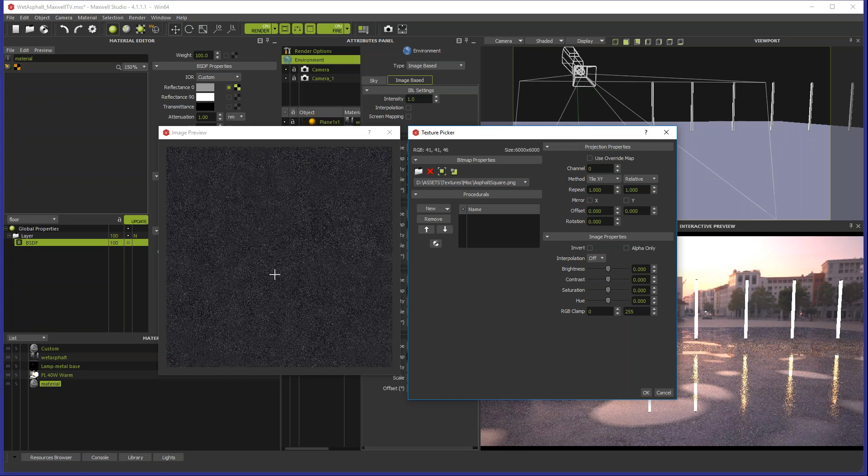So, new material, and the first thing, of course, I'm going to just add the base texture, the base asphalt texture. Let's see here, since it's already loaded. Should be here. So it's not a very good texture, actually, I just did this very quickly for an image I had to do. And so it's just a diffuse base, first of all, and maybe it's too dark now, just brighten up a little bit.

Now, since I'm going to apply this to this 10-meter plane, I'm going to switch on the use override map for the tiling, so I don't have to change the tiling in all of these layers. So I'm going to use the tiling from the override map here, maybe start with setting it to 3 or something. I'm just going to apply it to the plane. Okay, so that's what it looks like so far.

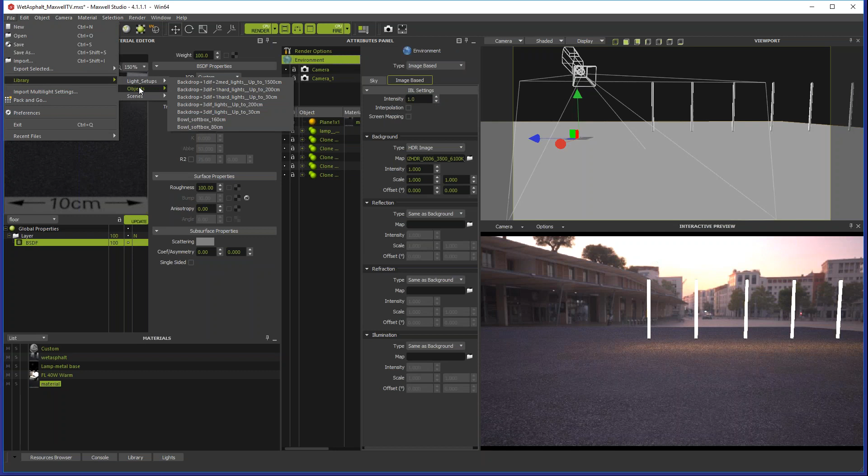And it's lit by an HDR, by the way, the scene, and these lamps are from the library, file, library, bulbs here, object bulbs, I just imported these ones.

Okay, so first I'm just going to make like an overall wet looking asphalt everywhere. So I'm going to add an additive layer, and I'm just going to set this to 0 for now. I might as well set the ND to something like water. And I'm going to use, first of all, a global bump map.

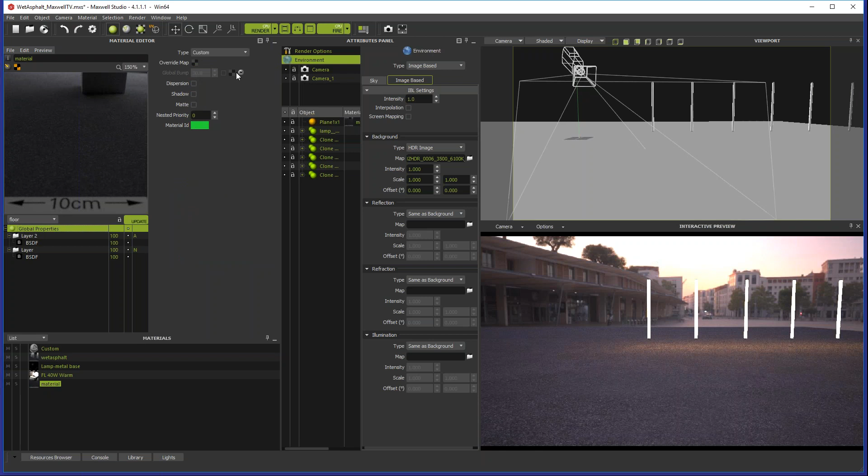But you'll see why I can't do that later on, I have to change it. So I'm just going to load this normal map that I created from the asphalt in Photoshop, and turn it on as a normal map.

So already there's a sort of a wet looking asphalt thing there. First of all, I can lower the bump. So even with the normal map, you can lower it a little bit and it's going to have less of an effect.

So now I have an overall wet looking asphalt. You can see how it looks really wet everywhere. So to make it a little bit more interesting, I'm going to load... not this one, this one, a sort of mask created also from the texture to make it not so evenly wet everywhere.

And also, by the way, sorry, things just really freeze up a little bit when I hit the render button. Yeah, especially with the material editor, I think it's very aggressive. Let me see if I can hit stop. Hopefully it still records when this happens.

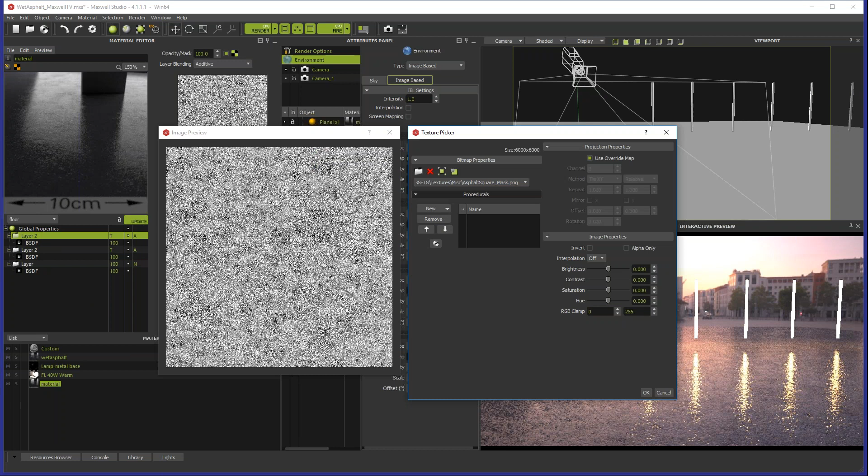And for the mask, I'm going to show you quickly also how to create this mask. So these are going to be my puddles here.

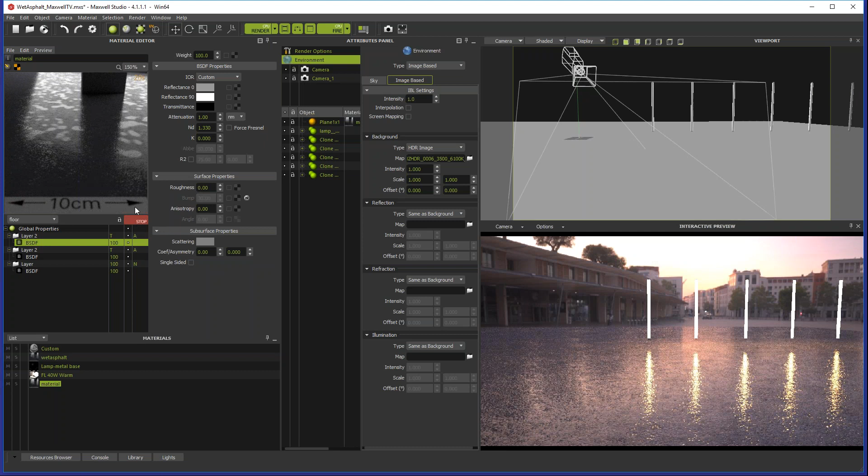And I'm still in additive mode for the puddles, which is going to be a little bit of a problem. It's just that it becomes too bright when it's not supposed to, because of the water. It's supposed to be water on top, but it still becomes too bright. You can see here by the horizon.

Let's see if that works. Okay, compared to if I switch it to normal mode, you know, it's supposed to be dark like this because of the water puddles, not bright like this. If you watch here, it turns bright with the additive mode.

But the main problem here now is that I can't use the global normal map anymore, because the puddles are supposed to be just clear water. So I have to remove the normal map from here, and I'm just going to set it to the wet asphalt on the bump here. So, not forgetting to switch it off from global bump and set it also to use the override map.

So now I have the sharp puddles. And set this also to normal mode. So already this could look okay, but the problem is now that since I have to keep the puddles here in normal mode, you can see especially the difference if I switch to additive, it starts to look weird, especially here by the horizon. So I have to keep these puddles in normal mode.

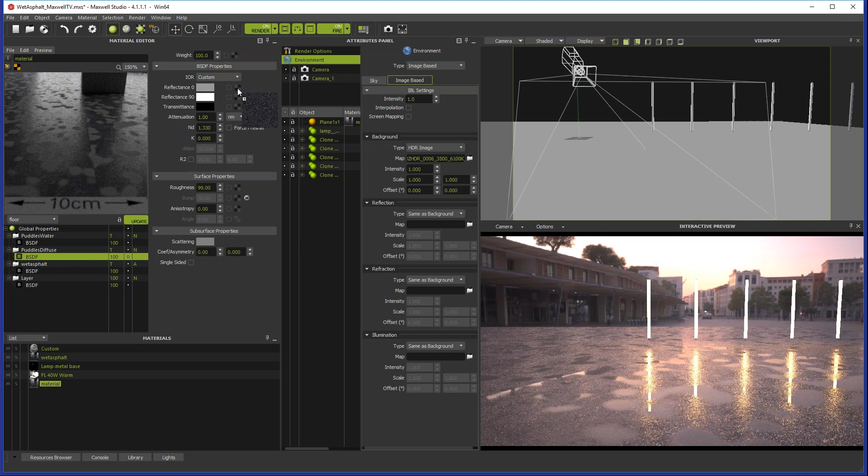And the second advantage is that now I can actually copy this to the diffuse, just making sure it's set to override map. And I'm sure all of you are familiar that when something is wet, it becomes darker. So you can mimic that also by just darkening this diffuse asphalt where the puddles are going to be visible in the water.

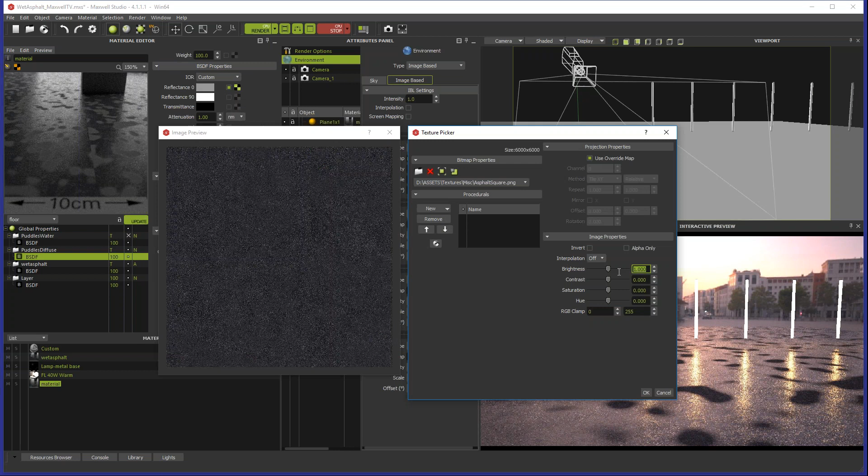So if I hide the puddles water for a bit, I can see what this texture looks like. Okay, so you can see how maybe that's even too dark. Let's try 5. Still too dark. Maybe 15.

Something like that. So now I have my underneath-the-water dark asphalt, and when I turn on the water puddles, everything comes together, and now I don't see any bump or normal map that I'm not supposed to see.

It's only visible in the wet asphalt here, not in the puddles. And because I lowered the opacity of the top puddles water layer, I can still see the asphalt a little bit underneath here. Also, with this mask I created for the puddles underwater, I can play with the contrast a little bit and make these edges smoother or sharper.

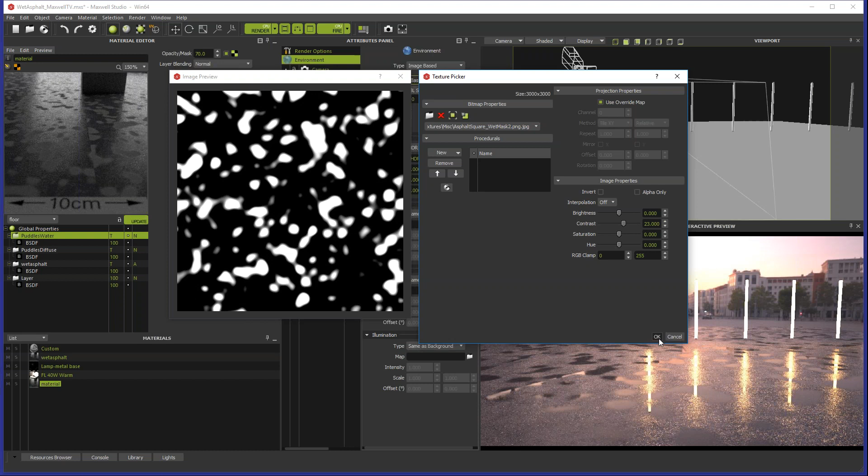So here if I raise the contrast, then suddenly the water begins abruptly. But this isn't so realistic, because if the puddles are thin, you're going to see a small area where the water is mixing with the dry surface. So I still like to keep it not completely sharp edges, but you can play around a little bit like this, so you have separate control with the water puddles compared to the diffuse mask here.

And that looks a little bit like this. Actually, is it this one or this one? This one.

Okay, so you can see now that we don't get that little artifact from the normal map of the wet asphalt. We just see the clear puddle, and we also still see a little bit of the asphalt beneath, and we had this nice transition between the asphalt and the deeper puddle here.

That's pretty neat. Yeah, so that's it really, it's all those layers. And again, you can change the transition here simply by using a sharper or blurrier mask for the wet puddles.

So you can see a dark outline here when the asphalt is still wet. Imagine you could also have completely dry sand, and then a puddle in the sand. In the transition area, it's going to be darker sand before you actually see only the water. Right, that's it. Nice.

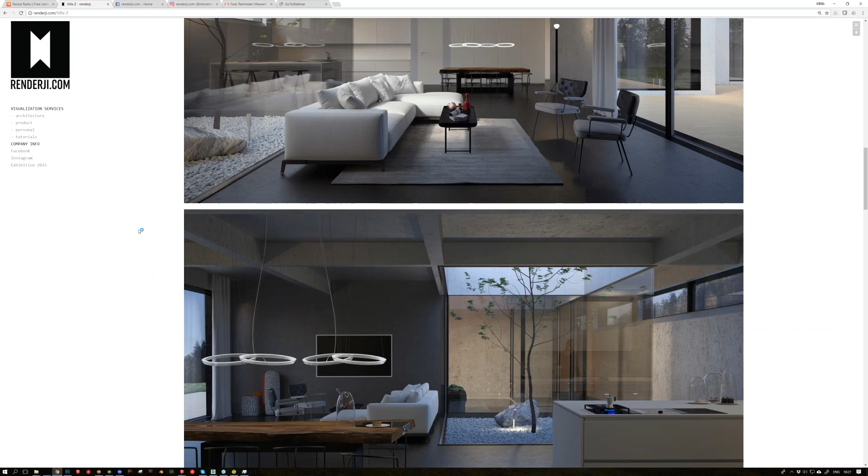When I was thinking about how to do this, I decided to just show the whole process of how we do images. Since we mentioned at the beginning that we want this to be informal, I'd like to emphasize that if you have any questions along the way, please interrupt and ask, and I'll try to answer everything.

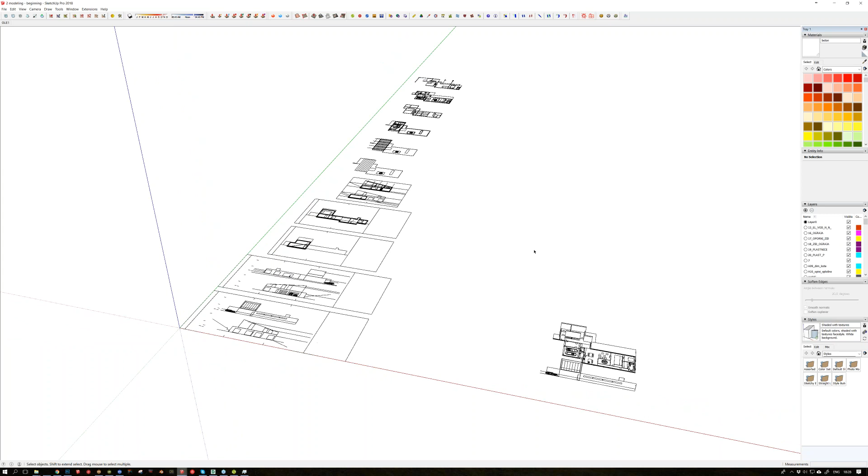I do some stuff in Blender or Cinema if there's something more complex, but then I always import it into SketchUp and use it as a proxy. So this is how importing a plan looks like in SketchUp, and this is how the beginning phase of the modeling looks like.

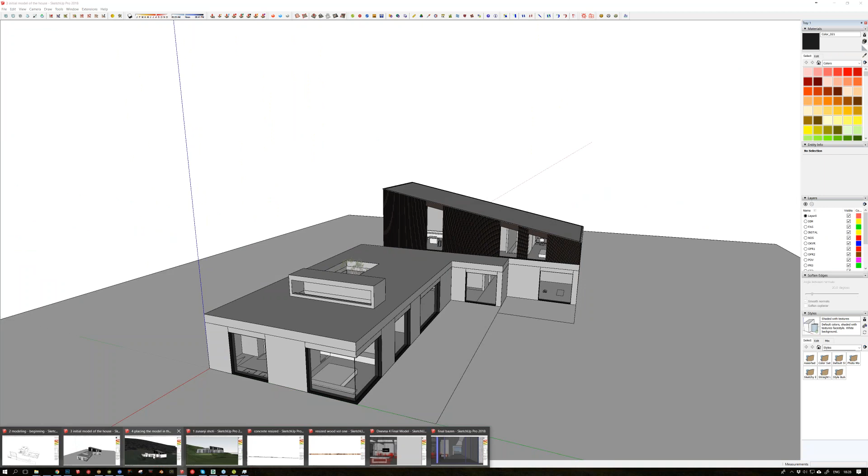Then we had the whole model of the house, which is like this. And then, the workflow is basically split into four sections.

The first phase we call the draft phase, where we propose scenes of the architecture to the client, depending on what they want to emphasize or show. In order to do these test scenes, we just place this super beginner level model into the context.

SketchUp has this neat feature where you can add terrain and geolocate stuff, so that's very useful when you want to do sun studies. For example, there's this really cool atrium in the house, and this helped us a lot to figure out how the sun is supposed to affect the building and interiors and so on.

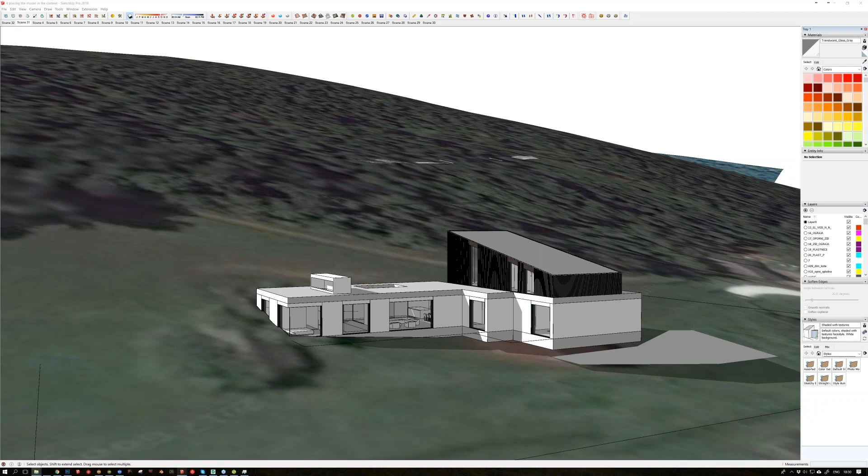For this first draft phase, we would see the client and say - they wanted to have 3 drone shots, because the emphasis of this whole set of images was to try and portray the vast plot of land around the house and this big hill up here. So we said, okay, we're going to do 3 drone shots, and this was used to decide for the scenes, and also to have some data later on when we would actually go on site with the drone and do the photography.

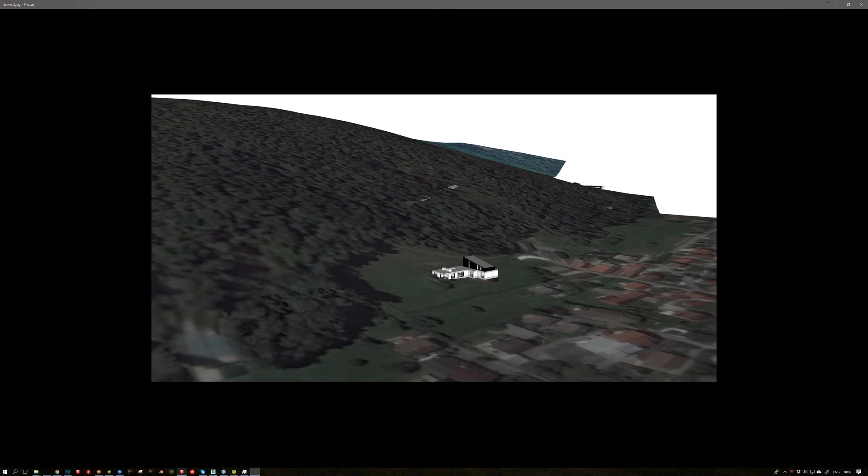Then they wanted 3 classical exterior shots - this is one of them, and the second and the third. And these were some super quick scene proposals for the interiors. So they gave us their blessing and liked the scenes, which was a green light to go and start doing a bit more complex stuff.

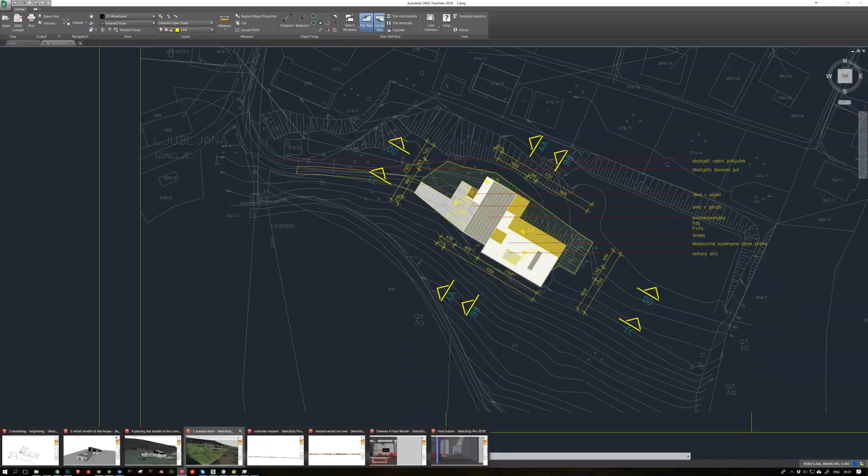So then in the next phase, we generated this 3D terrain based on the elevation lines, or something like that. We generated this in order to be able to place the model a bit more accurately than in the first shot. And then we started applying the materials.

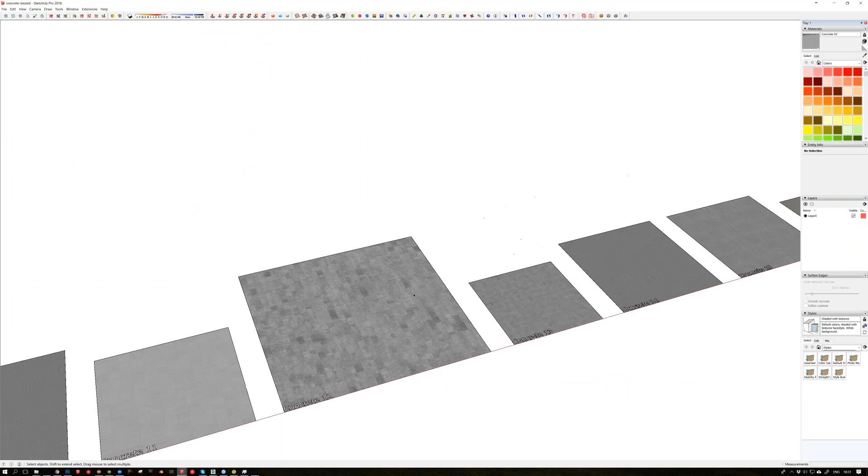As far as workflow goes in this project, we used the Arroway textures a lot, and this is a SketchUp file I made where I have the whole collection done with really small res textures, so it doesn't choke up the viewport and you're super fast to manipulate it. Let me pop up the scene manager here. Basically it's like MXM referenced materials, so in the SketchUp viewport you see low res stuff, and when it renders, it's going to be the high res textures and materials associated with it.

Could I just ask something here? So you did this to have a sample of the textures, which is better than just seeing them in the material editor, or?

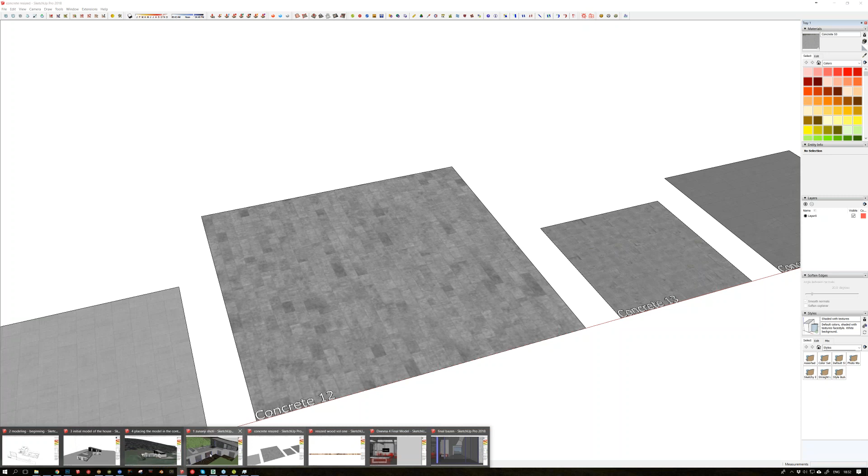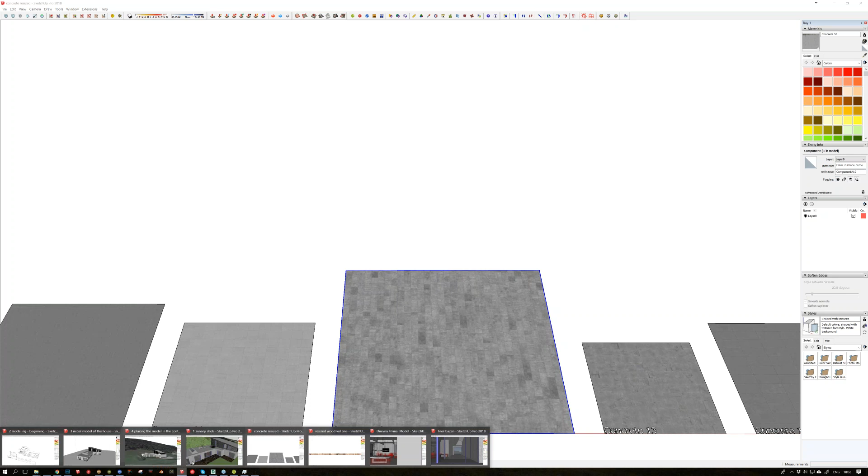Sorry, I don't think I understood the question. So what is the purpose of this scene, to have all the samples laid out? It's equivalent to having a few of these files open in Windows Explorer. The thing is I already have a SketchUp plane in real size, with the material applied in real size, and then I just copy it and put it into this model, and apply the colors, the materials, from this plane.

I remember this debate also on the forum, I think you had some similar SketchUp questions. The thing is, if I have this in low res, it doesn't choke up everything, and it makes everything much smaller and easier to operate.

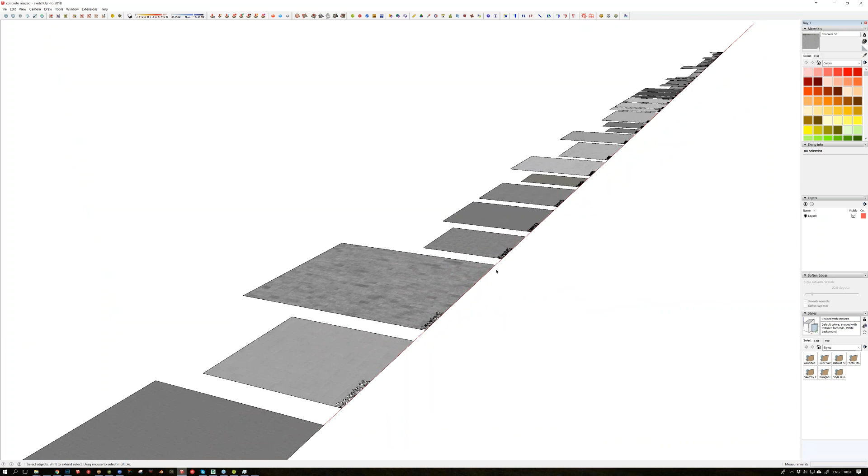Right, because the export tends to take a lot since when you're using big textures, right? Even when you're using Fire for some reason. Yeah, it's huge. This is why I figured this helps a lot. And the reason I have all of the materials in one SketchUp file is because they are already properly scaled here. I don't have to start each project by applying this texture, scaling it properly, and so on. It's just a time saver.

So I just wanted to show that, in this project, which was based a lot on concrete and wood, these were the beginnings of materialization. And then of course you would adjust the materials later on, but for the initial stuff, this was used in this way.

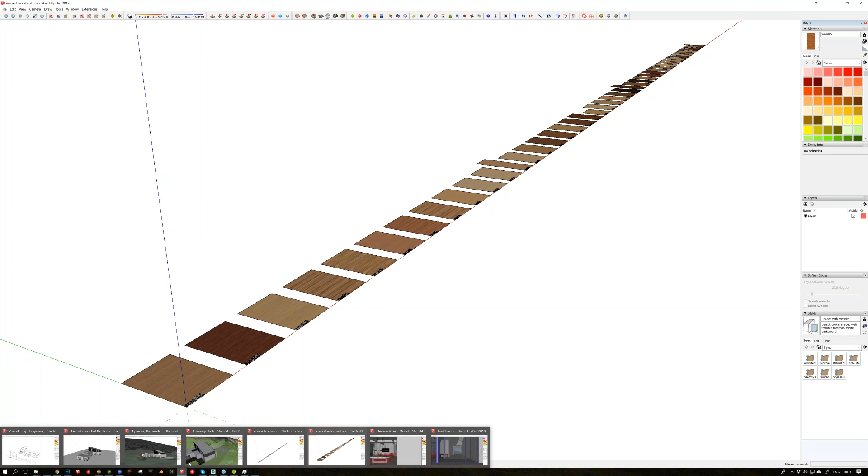Let's see what's next. In the previous step, oh my God, I forgot to mention the photo-taken aspect. So when we had all of this set up, we went on location and took a bunch of photos, and this was our post-production base for later compositing the renders into these images.

Did you take any special steps to line up the model with the photos, or was it more by eye? By feeling, totally by eye.

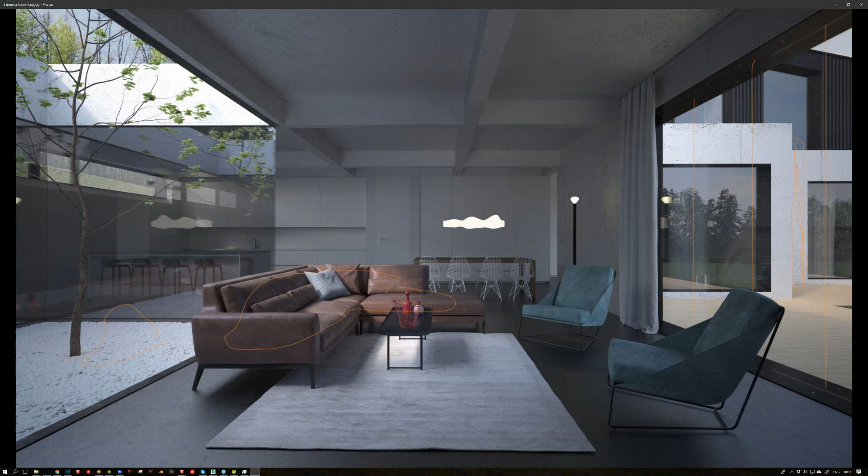So what you're showing here is one of the test images you're showing them, right? Yeah, this is basically the first render delivery, a set of images based on which we were able to have a discussion. We show the images and then talk about what things to show or hide. I draw over the renders and make some comments, and we discuss it. It's super rough and not there yet, far from it, but good enough for discussion.

We were very lucky with the drone ones because everything was cool here except the tree was like 3 meters too big, I think, so we just had to skip it. That was cool. And this was pretty much final from the beginning, so that was pretty neat.

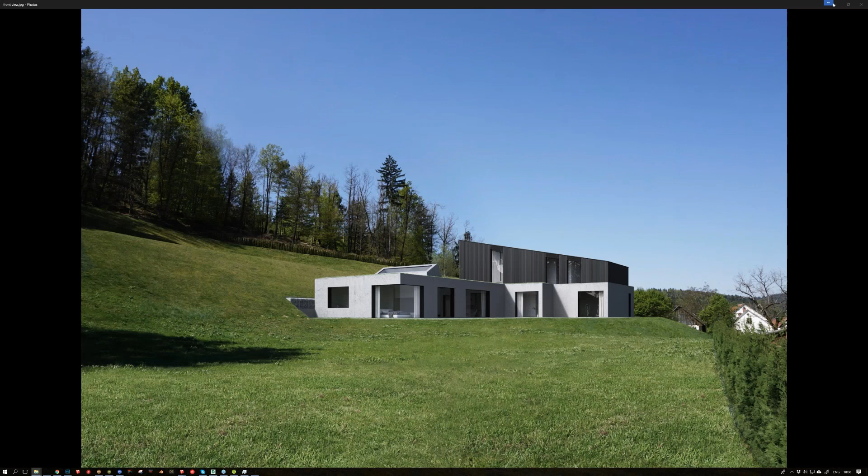Then we have these revisions, and I don't want to bother you through the whole tedious back and forth process, but I prepared 2 final interior scenes in SketchUp just to show you, for example, what the modeling looks like, and this is the MXI output that we get from it.

For example, this plane here is basically the kitchen, and it was made invisible to the camera. I really wanted to have the reflections of the kitchen in this atrium glass plane, but if I didn't have it physically here in the model, it wouldn't show up in the reflections either. So it's kind of weird to navigate, but you just turn it on before you put it to render.

These red boxes are like proxies, so these are all MXS references, right? Of furniture and stuff. Right. Yeah, exactly.

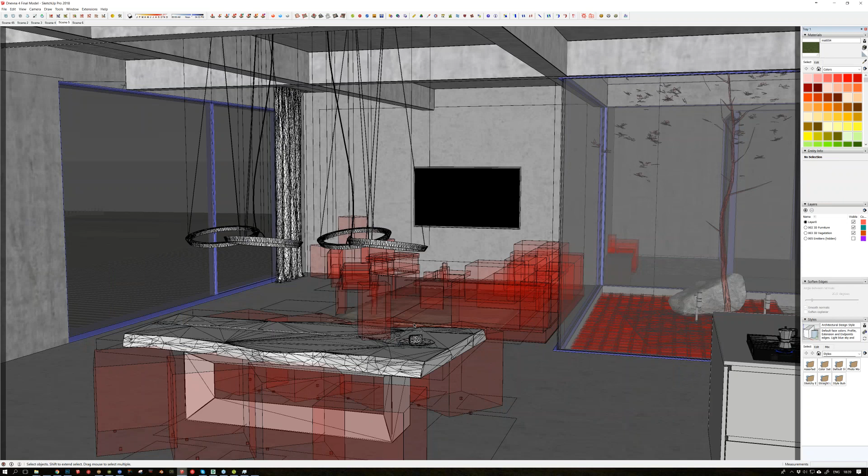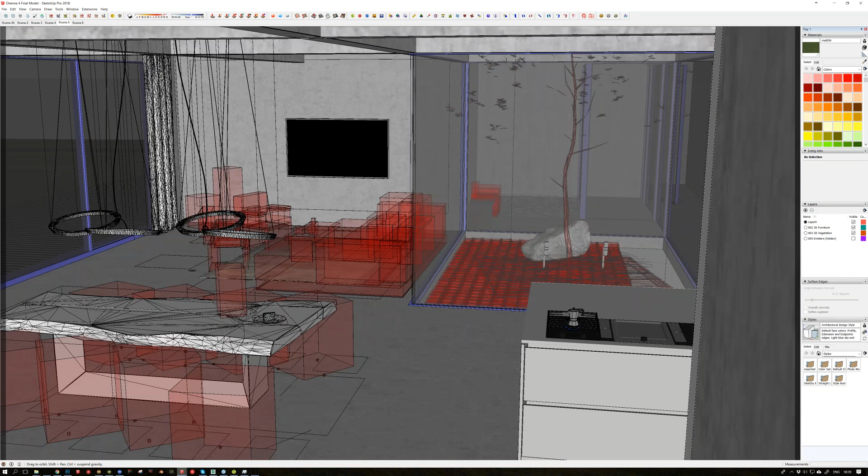I could go a bit more into detail if anybody's interested, but basically these are just reference geometry of highly detailed furniture that SketchUp is not able to handle at all. The unfortunate thing is when you import a proxy into SketchUp, you just get these boxes, and then I figured a workflow, which I'll just mention by words because I don't want to derail too much.

It's this really neat software called 3D Browser, and it has a functionality called Polygon Cruncher. Basically, I would import an OBJ or FBX of that model, put it into Polygon Cruncher, and reduce the poly count. For example, if I isolate this and make a super banal low poly representation of that model, then copy paste this into the MXS reference red box that appears by default, it's way easier to manipulate.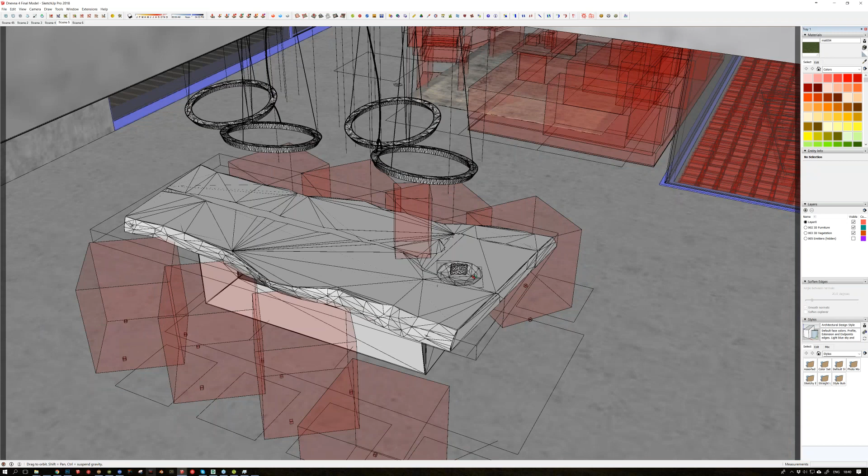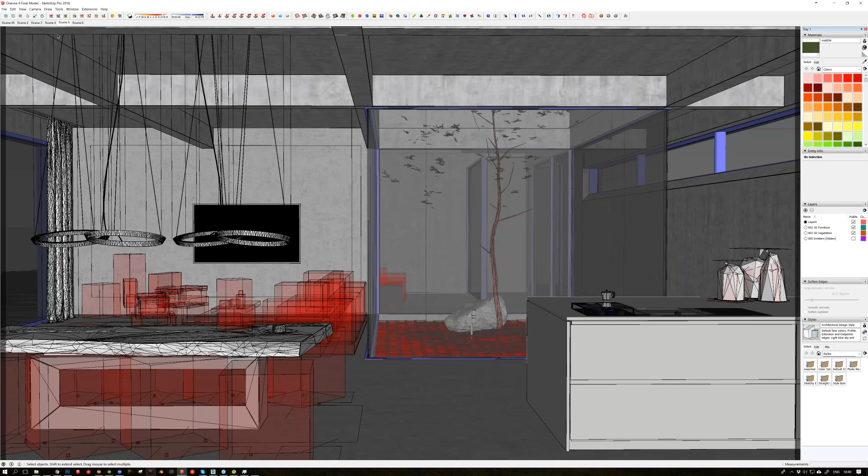It sounds kind of silly, but it's worth it once you do it. For example, this lady here is also super low poly, you can see it by the square, not round nose and stuff. She seems angry, she seems super weird. But it makes SketchUp operate fluidly.

Then this is the output that comes out of it, and of course multi-light is one of the key features, one of my favorite features of Maxwell. This is usually where I pop emitters into the scene as I feel like, according to the lighting scenario I'd like to create, and then all the fine tuning is always done in multi-light.

So I was thinking, for example, this is the final image, and I can show you how it looks like in Photoshop. So yeah, this is how a not really nicely organized Photoshop file looks like, but I'm going to show it anyway. Nobody organizes their Photoshop.

I don't know, one of my New Year's resolutions this year was to make a system for this, but it's still coming along. So basically these are the original files, and I put a picture background here.

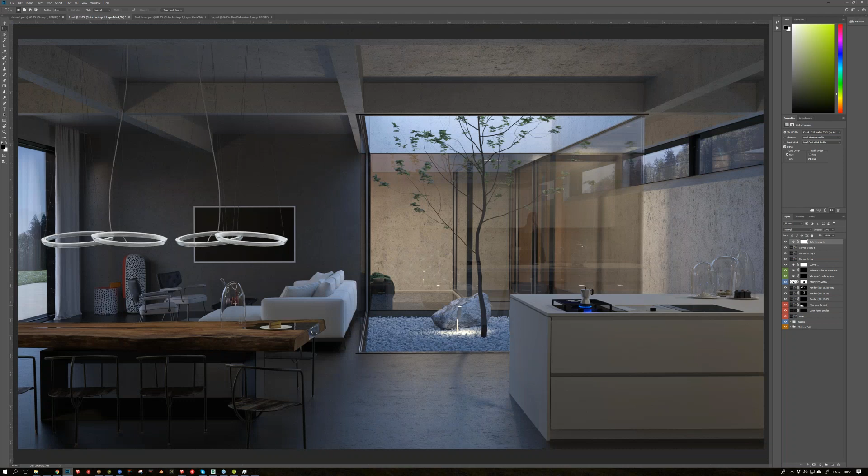I did this, you're gonna like this - these are the Vizpark tree proxies, sorry, grass models, great, scattered with scatter. For these, sorry, it's just a couple of pixels there on the left, like a super little amount. But still it's there. So as far as vegetation goes, if it's really in the first plane, or really close, then I would use 3D, but I would usually overlay it with a picture of grass just to give it that extra spice.

And these back here are a picture from the location, because I also had versions where I would generate the whole forest through Vizpark, and from some other retailers and so on. But it just never gets that whole juicy, real life look.

So that's why the photos are here. As far as the post goes here, there's really nothing special. I did a super dumb representation of the caustics here, which is just an overlaid picture of a pool in this area, I don't even know if you can see it. A little bit. I don't even know if it's accurate, but it was a bit better.

And I just slapped a LUT on it, which felt good. So that was about the post production of this guy.

For those listening that don't know what a LUT is, it's like a color lookup table - a color profile, or maybe a bit more sophisticated way to quickly make a nice mood, like a filmic mood or something. Photoshop ships with a few of them, which are actually decent, and I like the Kodak ones especially - they seem to work well on Maxwell renders.

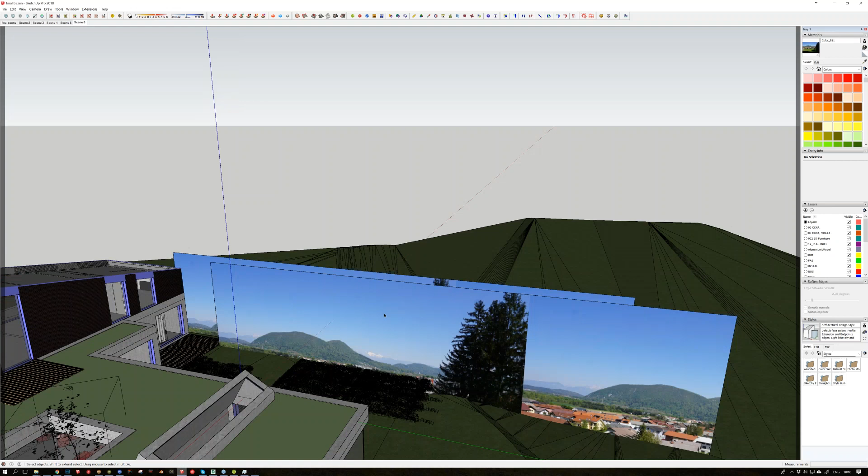It's just floating somewhere, hidden from camera but not from reflections, so I can see it in the pool. I see it in the pool sphere. It's super banal, but it works.

And the pool is just a flat plane, or does it have depth? It's super basic material. Let me show you... oh, it's not here. So it's a flat plane, not even any fancy displacement or whatever. It's just a super simple material.

Okay, so yeah, and we already went through the post. I think I just started using these LUTs lately, but it's dramatically better, like, effect in this image. So this is without, and this is with it, and it just spices it up a bit.

So I have two questions from people here. Adnan is asking if you could talk a bit more about the lighting setup, how you approach that, how many lights you had in the scene, and if you had any issues or problems to solve there. Then Christoph is asking, for the swimming pool scene, if it's only lit by IBL, or did you also use emitters?

Okay, so I can go through both scenes because they're open in SketchUp here, and I can show you. I'm gonna first show the MXI file to show you the amount of emitters in the scene — maybe this is the first answer to Adnan. So there's like 1, 2, 3, 4, 5, 6, 7, 8, 9, and IBL. Like 10 emitters, and I can just isolate them.

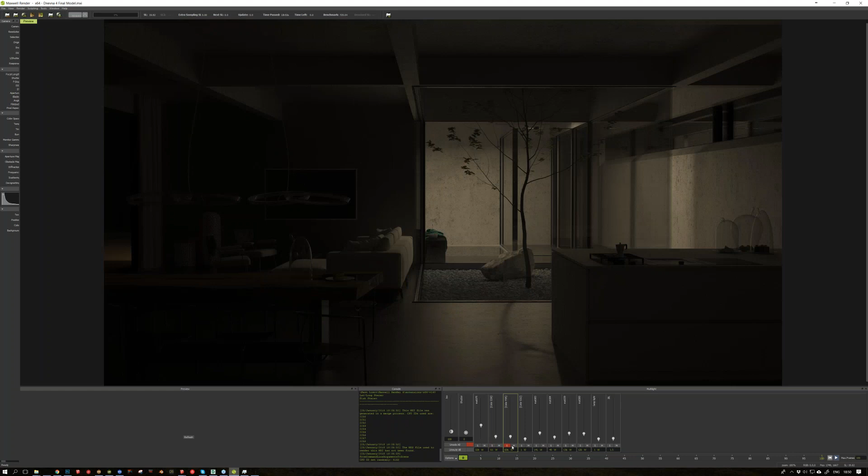And then we have, I don't know, this is something in the pool — I love the way I get this shade from the tree, so that's why it's there. This guy is just the stove with the gas thingy.

One question is from Karsten — I know from the forum he's trying to do an animated gas flame in Rhino, which is a masochistic way to do it, but he's wondering how you did that gas. I think I'm gonna have to disappoint you, Karsten, because this is ultra simple, but it's not animated. It's modeled — so now it doesn't even want to come closer.

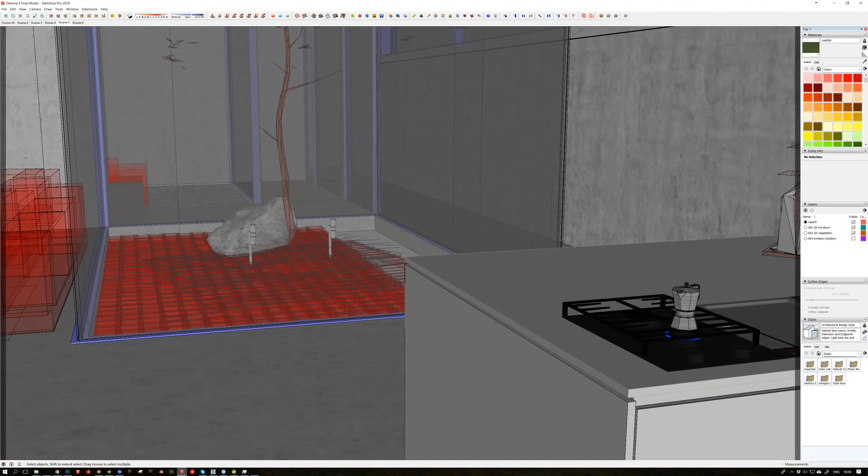It's just like modeled cones with a pointy top, then dispersed around. It's a super low poly body, but it has an emitter applied of this bluish color, and this is the result that comes out of it. But there was no masochism here, unfortunately.

Did you also use a layer mask to make it more transparent, or just lower the opacity, or did it just come out that way? No, I just lowered the intensity to 1, and I think I made 4 different exposures of this interior. For example, I couldn't get this to shine less than it's here, so I made a version of an MXI where I had the ISO a bit lower. Then in Photoshop I would combine all 4 lighting scenarios.

This light was here just like... I hope it's not pretentious. I was thinking, maybe you know you can change the decimals in the multi-light, so if the lowest is 1 watt, you can change that—right click and choose decimal precision. Are you serious? So you don't have to do what you did, it's maybe a little bit faster. So you can do 0.1 watts. Well, thank you for this.

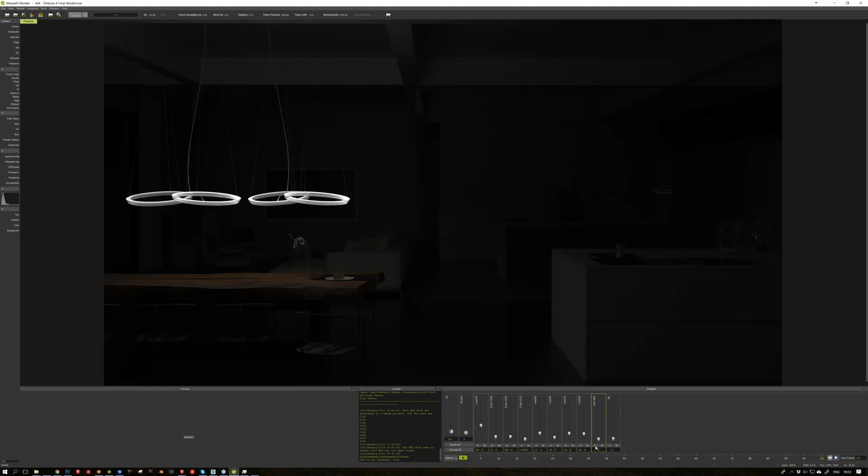I was just trying to emphasize the strong points of stuff that's already done in 3D. I don't know if I'm answering Adnan's question correctly, but basically the lighting setup was—I tried to create this early morning scenario with this girl just waking up and preparing her snacks, and I wanted the lighting scenario to emphasize and portray that. Of course that was manipulated in post a lot, but I hope I achieved the desired effect. This is how it came to be.

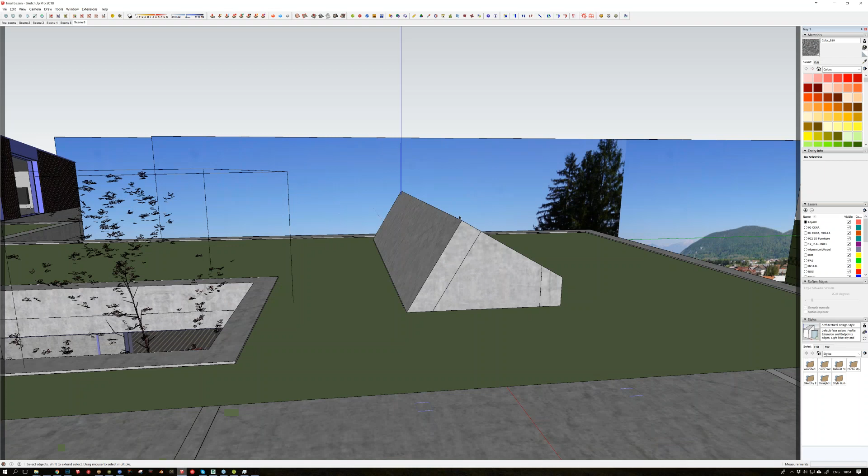And the question from, was it Christoph, about the lights in the pool? He was asking if you're using mostly IBL, especially for the pool scene, or if most of the lighting is made just by the IBL, or did you boost it somehow with emitters or something?

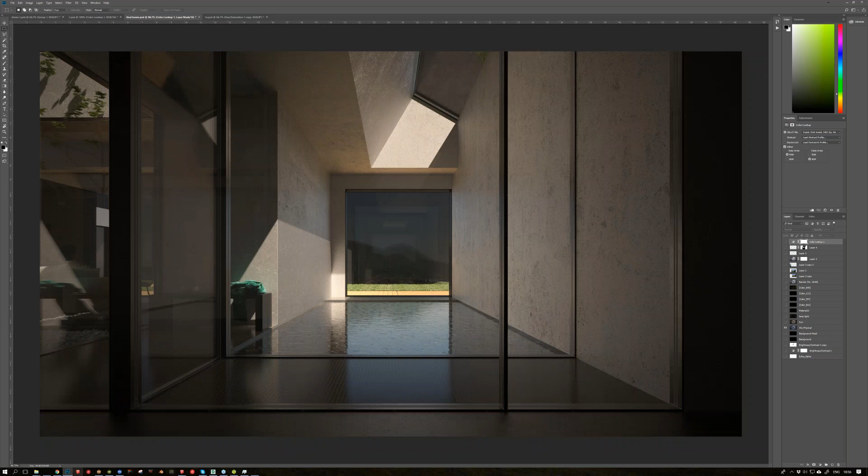I like the fact that I was able to make, for the whole ambient thing, a combination of these two guys in the MXI file with multilight to get the overall feeling, and then I had some emitters here in the scene.

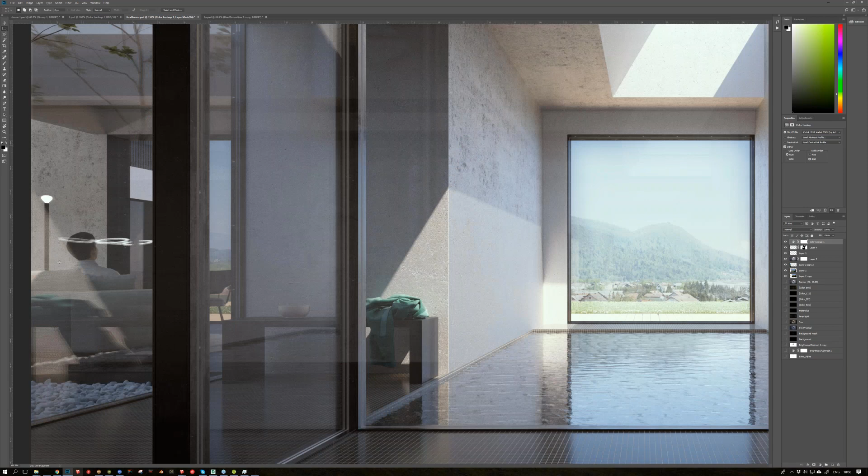There's also a dude here relaxing and looking out the window, and there were some lights on the left side, but not in the pool area itself. We made mock-ups with girls swimming here but it looked super banal, and I really wanted to emphasize just this thing. I didn't want to make it too cheesy, so this is how it ended up.

Yeah, and I don't know. So one question: are you using regular glass for every glass material, or how are you making the glass?

I can show you, I made this when I started doing this in an organized way. This was the first thing I did, create a few MXMs with AGS materials, the architectural glass solution Maxwell materials. So this is like, I always start doing windows like this, with AGS at 1% reflectivity all the way to 100.

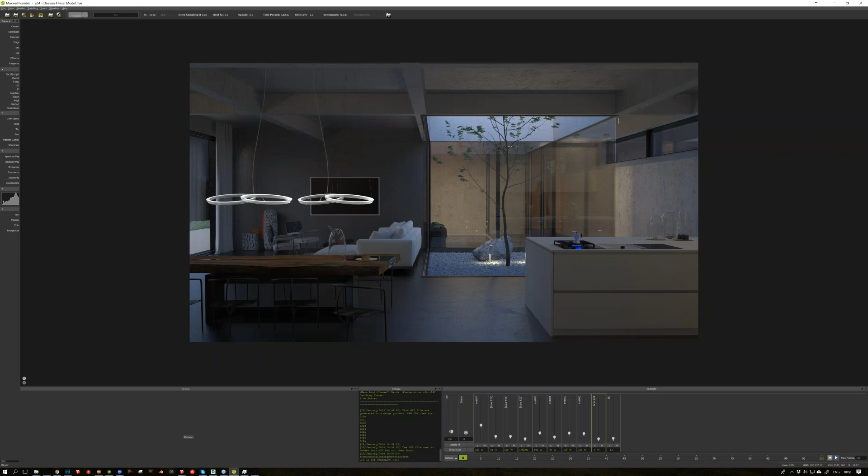I just start, I don't know, with 20, and then see if I like the reflections coming out. It's fine, if they're too strong I'd just use a lower value MXM. But the thing I don't like about these AGS materials is that it's really hard to achieve these effects, like with a regular glass material where the edges... how to articulate this.

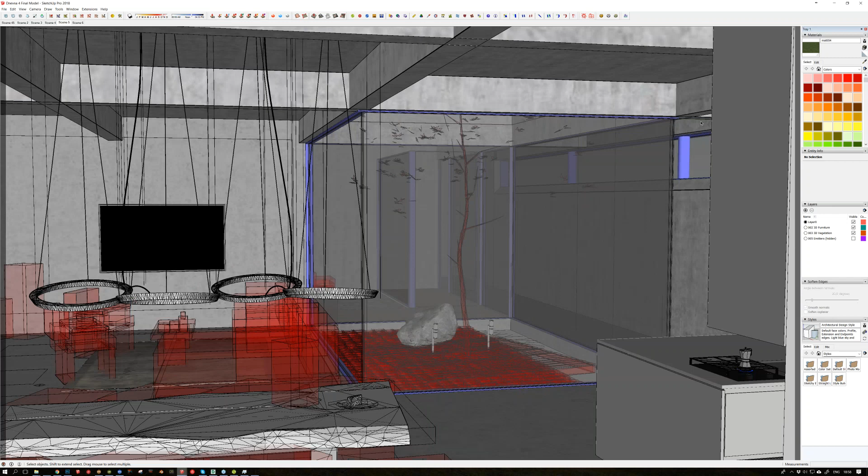Yeah, the edges of the glass. If you do it with an AGS glass material, it's really hard, you can't get these edge details. So here I did a dumb solution: for example, this plane is AGS glass, and here, where we have the joints between glass, it's like I don't even know if I can point it out, it's a millimeter thick. So this is the fugue between, or this layer, the glue or whatever between the glass.

It's a super thin, rectangular extruded plane. It's not a box, just a plane, extruded, super thin, and this one has the glass material applied there, and this way I can use AGS to fine tune the reflection, and also have this small detail here with the glass material.

Can I ask you something? Did you also try doing it with glass first, to see what it looks like? I always had this prejudice of extending the rendering times if I use glass, because of caustics. I know you can switch it off also, but this is just something from when I started out and AGS became default for glass planes, so that's that.

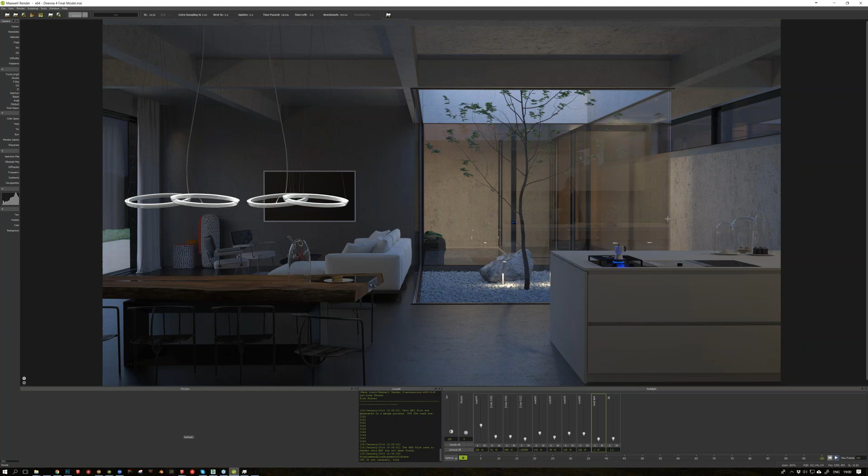I didn't even reconsider that, but of course glass is used here in these domes, because with AGS it looked kind of wonky. It depends, if it's a smaller scale thing, like a product, if I have to make a bottle or anything, of course it's glass.

For windows and stuff, you prefer still AGS. Yeah, this is something interesting.

I need to do some interior tests to see if there are any serious problems with glass. Actually, I have my own render farm with 200 threads, so these speed issues aren't as big a problem as they were when I was starting out with a laptop. But still, this is just a habit, something I've been doing since the beginning, AGS planes and that's it.

Do you usually render other render channels too, or just alpha? Sure, I mean for this one I didn't. It depends on the project. If it's a product, I would always have the material ID channel or stuff like that. But here, totally depends on the project. I knew I was just going to remove the stuff in the windows and replace it with a photo, so for that I only needed the alpha.

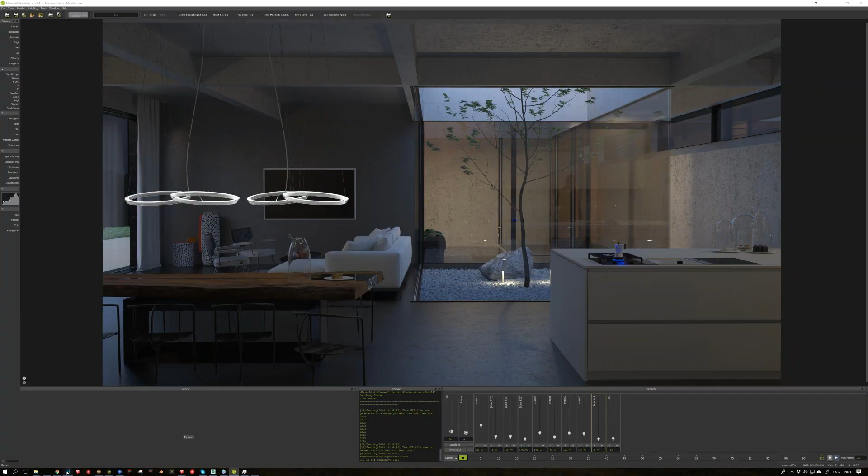So, two questions really. Do you work a lot with... now that you've done so many ArchViz renders, I guess you have a material library which you reuse all the time, right? Sure, yeah, of course. Could you talk a little bit about how you organize it, and what the categories of materials you use are?

And then the second question, from Adnan again: how do you usually calculate the time for a client? How do you tell them it's going to take 3 days, or 1 week, or two weeks? Legitimate question - how much time did you actually have for this project?

Well, this was a super relaxed timeline for a project - basically it was like 2 months. But we also did an animation for it and a VR thing, which was done in Twinmotion, a game-based engine where you can import SketchUp models fairly easily and render them in a very reasonable amount of time. They look like video games, but for the purposes of this project it was enough. So all in all we had 2 months, and the production of the animation was included here. We were pretty fast with the animation because the rendering times were not that high, so we were able to focus more on the architecture.

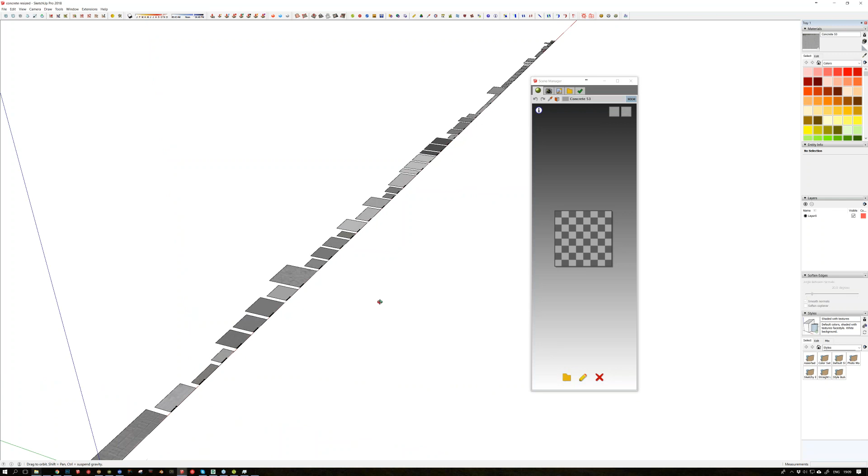So, sorry, there's also not an exact answer - so you don't use very much the built-in sort of material creation in the SketchUp plugin in Maxwell, or do you just go via MXED usually?

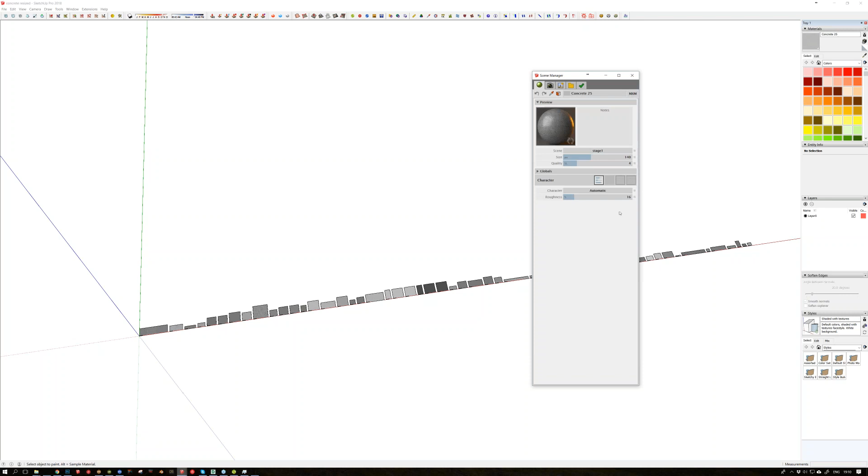The thing is, in the draft scene I would always use that because I don't want big textures in the preview models for the preview renders, because if I slap 6K textures in there, it's going to take longer to export. So I would just do it with the built-in thing and adjust it, like it's either diffuse or shiny, and this is good enough for the draft. Then I would usually do the MXM stuff, because I remember from these tutorials I mentioned before that you can get much nicer results than the built-in thing, and I kind of do the MXMs when it's ready to go into more high def.

Right, because then you can also create the library and stuff, right? Exactly, this is what I like about Maxwell a lot - this thing is external, so it's not SketchUp related.

I can use it also in Cinema or in Blender. Sometimes when I'm preparing the proxies, I would use Studio, and then I would just drag and drop the MXM material presets into Studio. This is super useful, and that's pretty cool.

Karsten was wondering how you go about with the texture scaling, but I guess in your scene here, you're just using the scaling directly from SketchUp, right? You're setting the texture width.

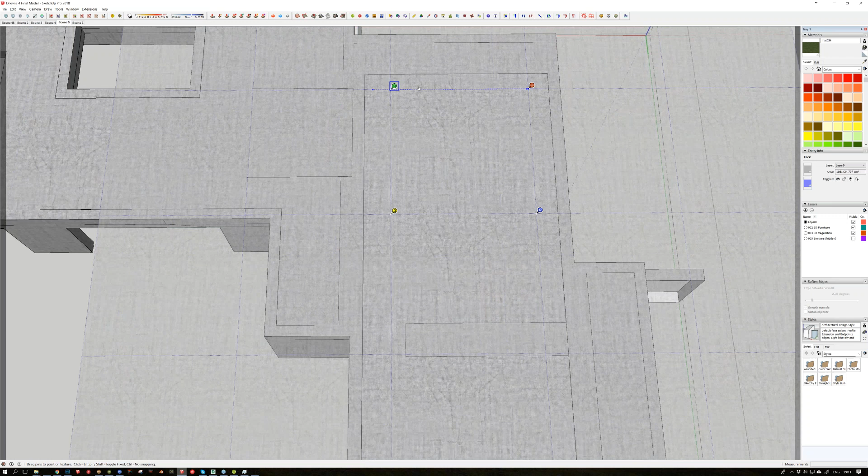If we want to see how this concrete texture is scaled, I'm just gonna use the built-in SketchUp thingy. So this is moving the texture, and this is making it smaller, and that's basically it as far as the scaling goes. Or you can do it here via the gizmo, whatever you call it.

So you don't use the texture thing via the material? It has a scaling, you mean in the MXM? Yeah, or both in SketchUp and the MXM. How do you determine the correct scale for a certain texture?

Here we don't have some raster. Where we have concrete, I would just do it as the default textures come in. I think it's like a plane of 4 times 4 meters, and it's already done like that, as it's supposed to be in nature.

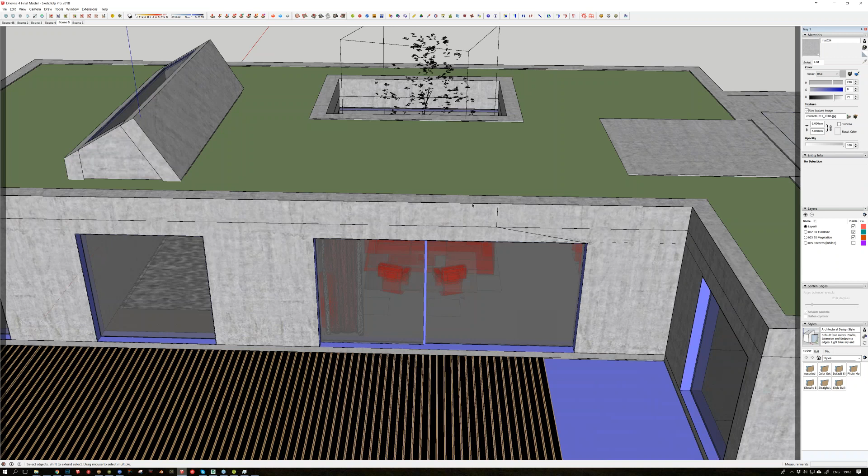For example, I was working on a project before where we had to do tiles on a wall, and each was like 15 times 15 centimeters. I just adjusted it — it's super stupid, but I just did the SketchUp resize tool, made it small, and then measured it with the line tool, 15 centimeters.

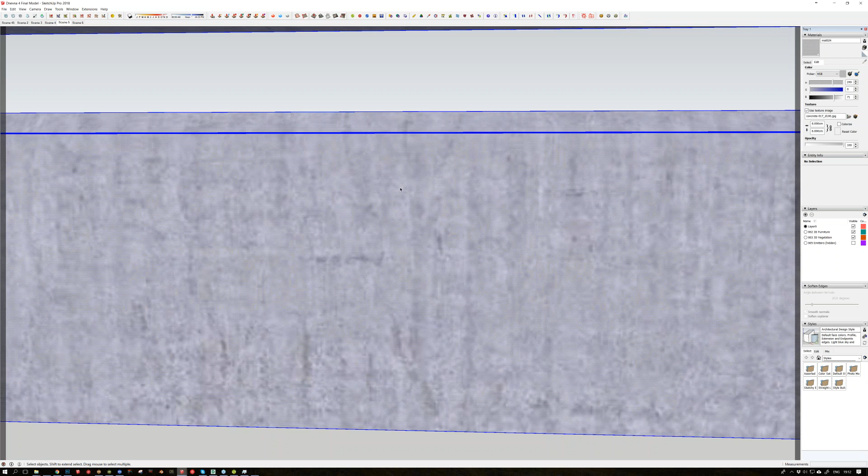Okay, now it's the correct scale. So that was it. I don't use anything else.

I like the way that this SketchUp viewport representation of the texture scale is then maintained when you put it to render. So in your Maxwell materials, I guess the tiling is always set to 1, right?

Yeah, exactly. So when the tiling is 1, whatever you see in the SketchUp viewport in terms of scale, that's what it's going to be in the render, that's right. I think for the way I work, that's the best option. In some cases I had to change that tiling within the MXM material, but I usually don't, because I want the thing to come out rendered as I see it in the viewport, basically.

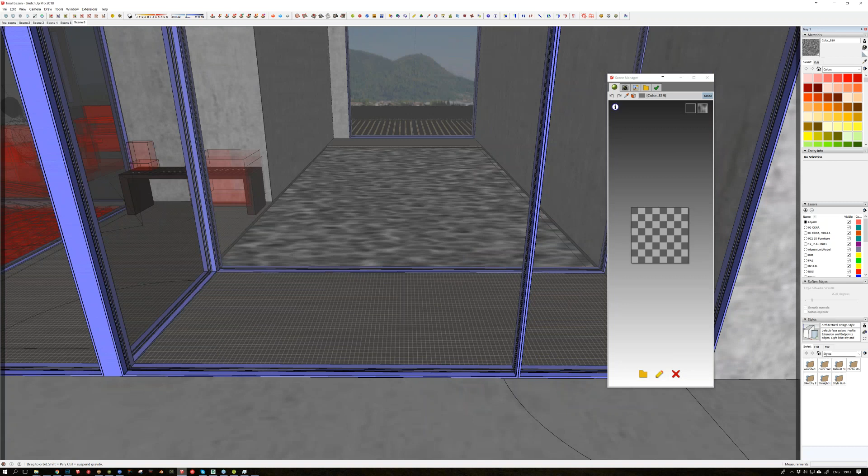So here we have this tile example. You can see it here in the bottom — this is a tile which is 2.4 meters wide. If I go here in the material settings, the whole texture is like 450 by 450 centimeters, and if I put it to 900, I'm gonna double the tiling.

So you're just using the scale in SketchUp, not doing anything in the MXM itself — the MXM is always tiling 1. Yes, exactly, so it can render as it's in the screen.

Carson is also asking, where do you get your 3D people from? These are from AXYZ Design, and they're pretty decent. I actually worked for them on a few images, and I did some tutorials for them as well. These are like the proxies that I mentioned before.

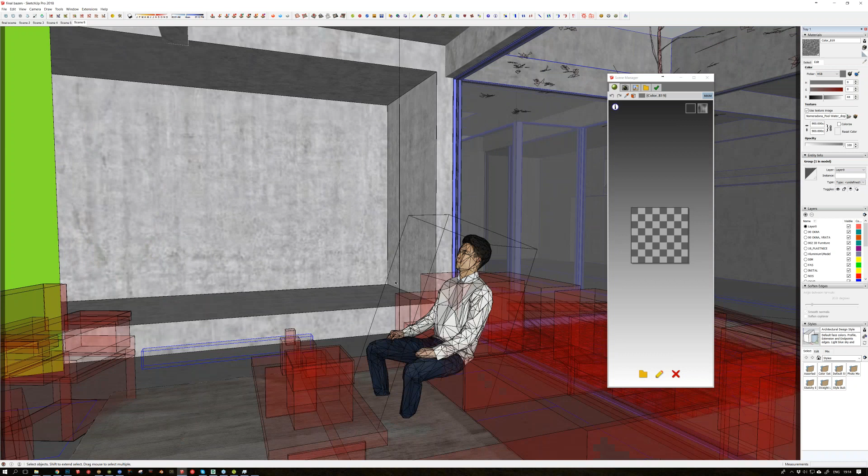I was like a full 3D guy for a really long time until I figured out it's good to also go on the other side in post. I would usually do everything in 3D, so placing people into renders was a really tedious thing, and you never could get the results right, and there was a lot of post work. Then I figured out all the benefits of using these 3D guys, and it was really cool.

But it's not something that I would use in the foreground, unless it's something like this image, where this is a 3D guy but he's so out of focus that what matters is its silhouette and the representation. So this is cool, but these guys are like photogrammetric models.

So the hair can be sometimes a bit weird, but they look super mid-ground, in the third plane thing... background, you mean? Yeah, background, super sophisticated terminology. So I guess it's foreground, middle ground. Middle Earth. Mordor.

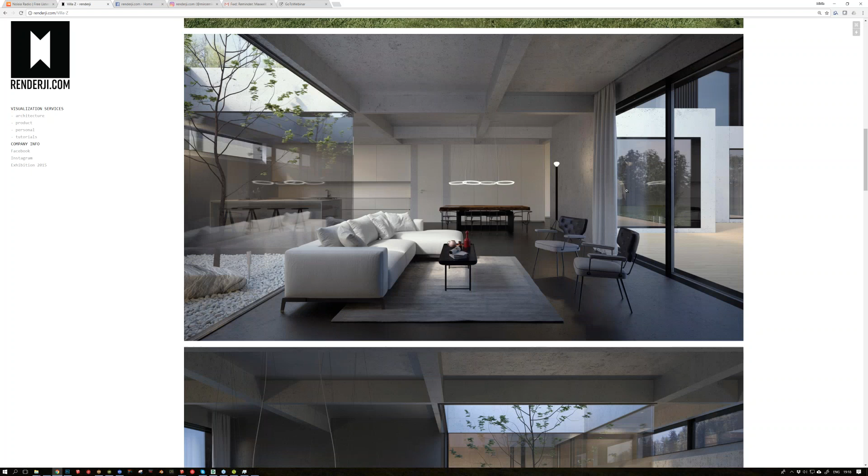This whole area of human assets is improving quite a lot, and they're really pretty believable. I just love how easy it is to place someone and get a sense of scale - this guy is super hidden here, but if you pay attention when you explore the picture, you get a sense of scale and human proportions. I love that it blends in according to the light scenario in your scene, and you don't have to mess around with post stuff.

What would you say is the most time-consuming step in a project that you have? The most time-consuming usually...

Trying to convince yourself that this is already good enough or detailed enough. I hope this doesn't sound wrong, but there's a lot of times when you know it's okay for the client, and then you think, maybe I should move this rug 2 centimeters to the left or right, blah blah blah. So this is time consuming.

Along the way you learn that not all projects are going to be portfolio projects. If you're able to make a difference between that and provide good results in portfolio and non-portfolio projects, without wasting time on details that don't matter - optimizing that is a big thing if you manage to achieve it as a freelancer.

I guess doing light scenarios at the beginning and trying to figure out what you want to portray with your image, what you want to say. I don't want to overemphasize this narrative thing - there's always this talk of trying to make a story, but if you're doing a 3D render of a mattress, you can't really tell a story there, it's just a product. But in archviz, you can - it's pretty possible and it's cool.

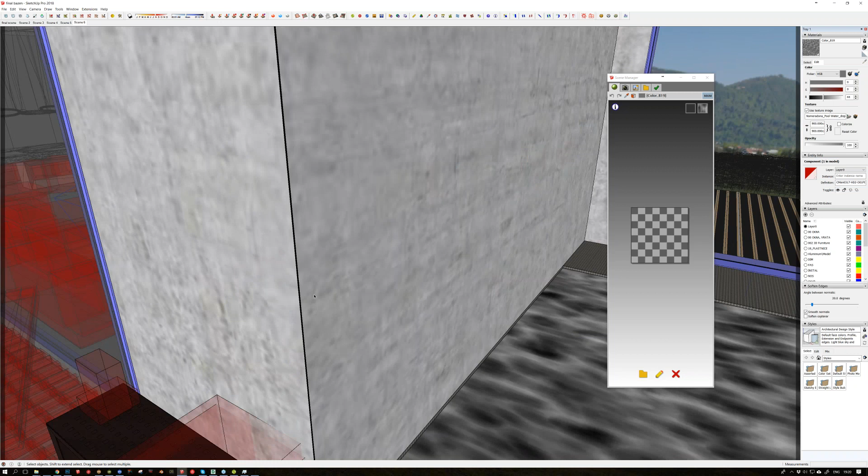But it's a little tedious in SketchUp, so I would usually do that at the very end. I know Peter Guthrie, when he was still doing stuff in SketchUp, would always have one geometry - for example this block of concrete - he'd make a group and hide it, then use another copy which he would cut the edges on. Because it's not parametric, you cannot redo this once it's done. So whenever he needed the original geometry, he would just unhide it.

But I think that was just too much work. I burned myself a few times, like rounding everything at the beginning, and then I learned that we do this at the end. It happens to me.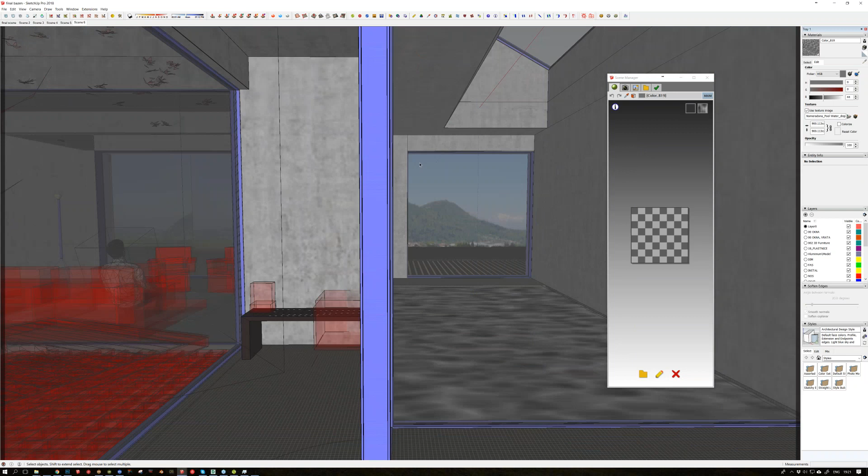Not worth it, especially since that plugin doesn't work so well, especially with openings and stuff. It just creates faces where you don't want them. Yeah, with openings it does that. I'm really happy for this Fredo guy, the SketchUp plugin developer. He saved quite a few hours.

So what's your render resolution usually like for these clients? It depends, I try to deliver everything in 4K. And if they just need it for the web, and it's something that needs like 20 images, then it could be lower. But I always think it's really unsustainable to do anything less than 3K or 4K.

In the long run, if I want to do an exhibition or something in 10 years, and I go through all the files and they're all done in only full HD, it's not good for printing. Or sometimes a client calls you after 3 years wanting something in high res, and then it's really tedious to re-render it again. So I think in the long run it's better to do it as high res as possible.

Okay, maybe I had one more question. Sure. It's more about what are your impressions now with version 4, and what would you like to see in Maxwell for your workflow? What's the next thing? Well, of course, besides GPU.

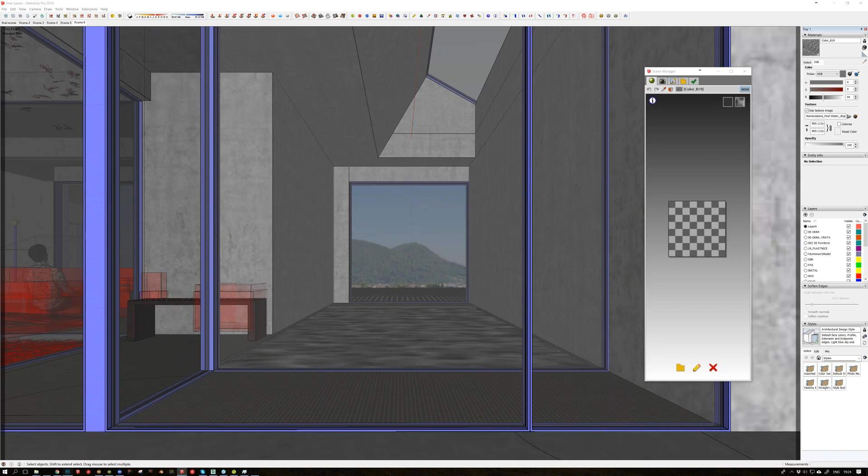I don't know how that's done. And I really like the denoising feature, but I would love some more parameters to fiddle with, to control it. I couldn't get it to work properly through the network renderer - when I get results back from the farm, I can't redo those things. I was talking to Fernando and he gave me a workflow, but for now it's something I don't use that much yet. But definitely a bit more denoiser flexibility, or possibilities to manipulate it.

Speed is of course an obvious answer, but I don't know, I figured I'm mostly happy. It's never good enough, of course, but when I was starting out and still studying, trying to figure out which tools I liked the most, I realized I had this scenario - things are different now with V-Ray, but back then I had to learn whole loads of parameters for each type of scene if I wanted to make nice shots for interiors or exteriors, and that was just too much. Maxwell gave me instant quality, but it was a bit slower.

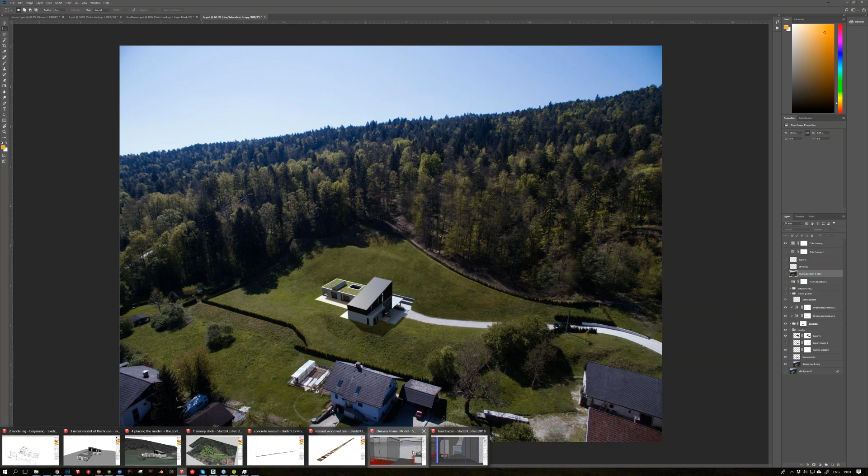Sure, there's loads of plugins I can show you. The most important ones for sure are, well, first get this: there are two ways of plugging plugins into SketchUp. One is the extension store by a website platform called Sketchucation, and the other is the built-in functionality, I think it's called extensions, and you have the extension manager. This is like Trimble's alternative, the official thing, but you can find some things here and some there.

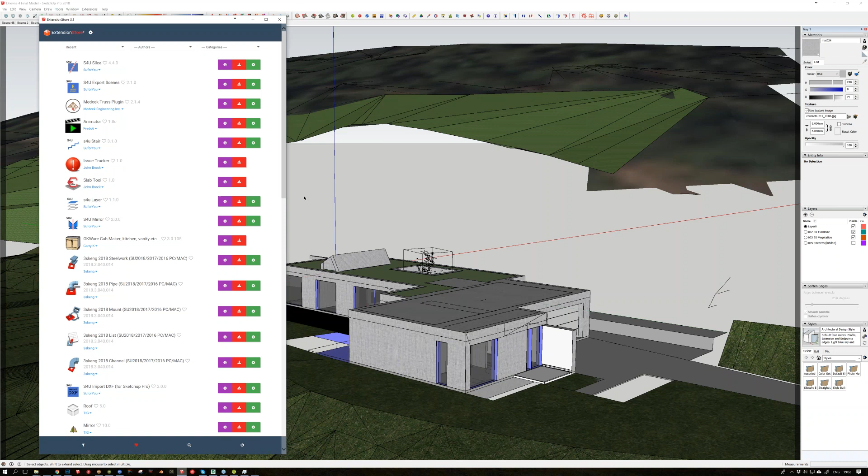It's really nice because, the cool thing about SketchUp for me is whenever I'd have a problem and feel that it's possible to do something in a faster way, I'd look for a plugin, and I'd realize some guy before me already had that issue and made a plugin. That's fantastic, and I was never disappointed.

The most obvious ones that you really need in life are the stuff by a guy called Fredo6. He's like the default dude. I think it's super important to have all of his stuff. For example, Round Corner is his plugin for doing round edges, it's super self-explanatory. I don't want to show everything, but one of the lifesavers was this plugin called Fredo Scale, by the same guy.

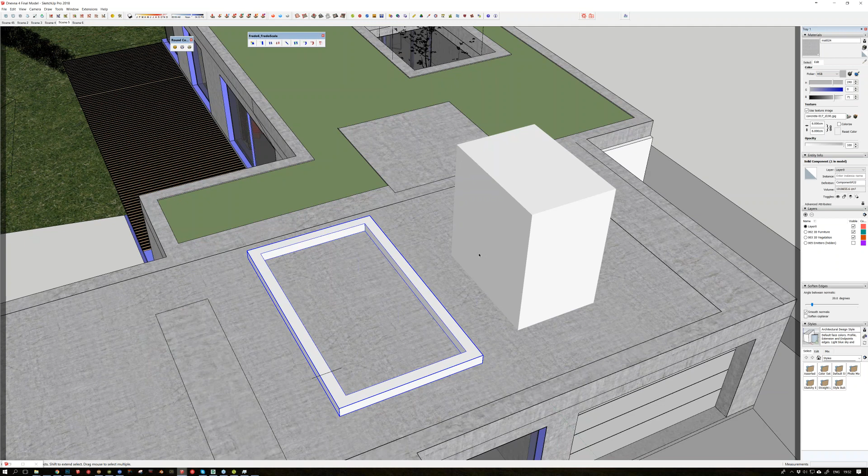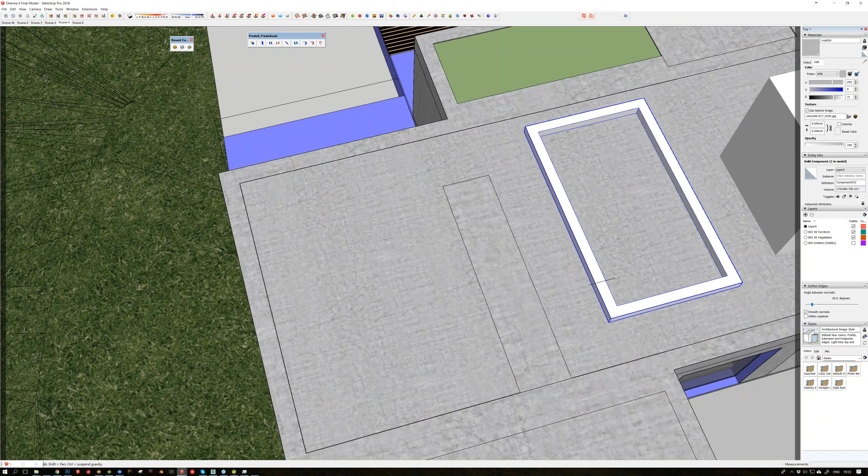For example, this is a window frame and you want to make it a bit wider, but you don't want to redraw everything. You've got this Fredo Scale thing, which means if I stretch this, it's going to keep the width of these profiles. But if I use the regular scale, it's going to make those thicker and it sucks, and you'd have to do every window separately. If I use Fredo Scale instead, it does this properly, but there's a bonus: if you click here, press tab, and type like 500 centimeters, it's going to do it exactly like that.

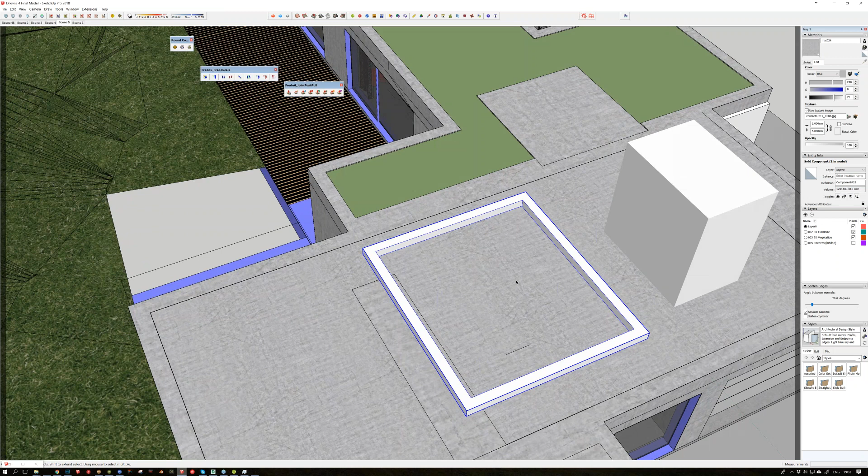That's nice for modeling, and this was one of the tedious SketchUp things I couldn't get around until then. Then you have some things by him like Joint Push Pull. For example, if you have a sphere and want to push pull different parts of it, you can select five of them, and even though they're not planar, you can still kind of push pull them as if you were offsetting a sphere or something. I don't know if that made any sense.

There's loads of them, I can just name them, and I really strongly advise you take a look. Basically, everything by Fredo6, just get everything by this guy. In the SketchUp store you have nice links to the website where you can get quick GIF tutorials on how to use them, and it's super useful.

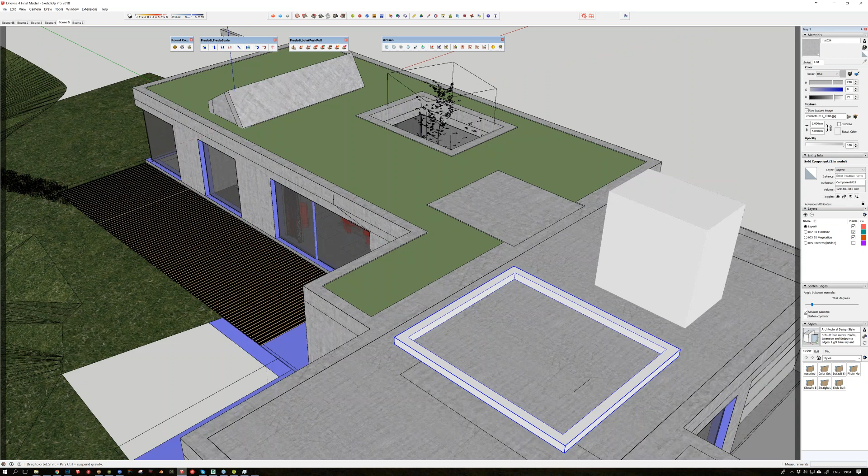Then there's this Artisan plugin. It's payable, but it's pretty cool, for subsurface... no sorry, subdivision modeling in SketchUp. It works in SketchUp, watch this, go crazy. It's a cube, and now it's a sphere.

If this crashes now I'm gonna laugh my ass off. Okay, cool, no, it still works. So yeah, amazing, and you just tell it the amount, like 2x, to make it more detailed and so on. This is super useful when you get models from the warehouse, which are usually not detailed at all, and you can give them extra roundness, it smooths them really nicely. It's also super useful if you want to do your own terrain.

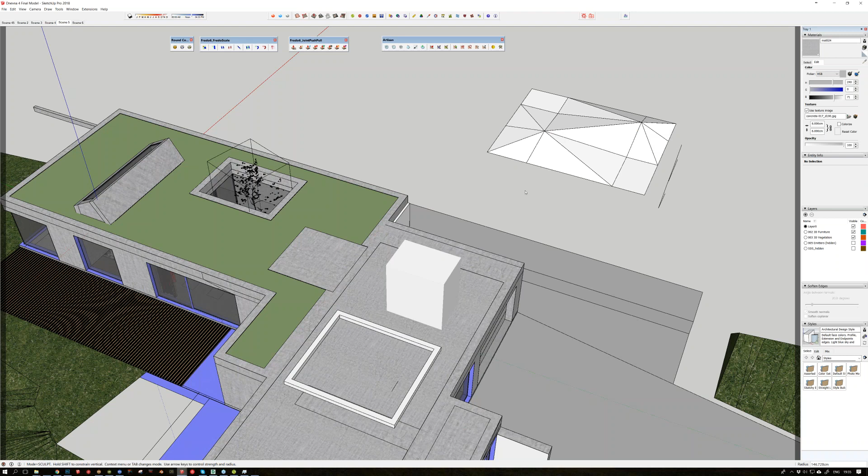Let me just do it manually then. You can paint terrain here, for example, with this tool. So if you had this with more fidelity, you can paint the subdivisions. If I want to do a quick... no, this can take some time, but I guess you get what I mean. You just subdivide the plane and then it's like a 3D brush tool inside SketchUp, useful for a lot of things.

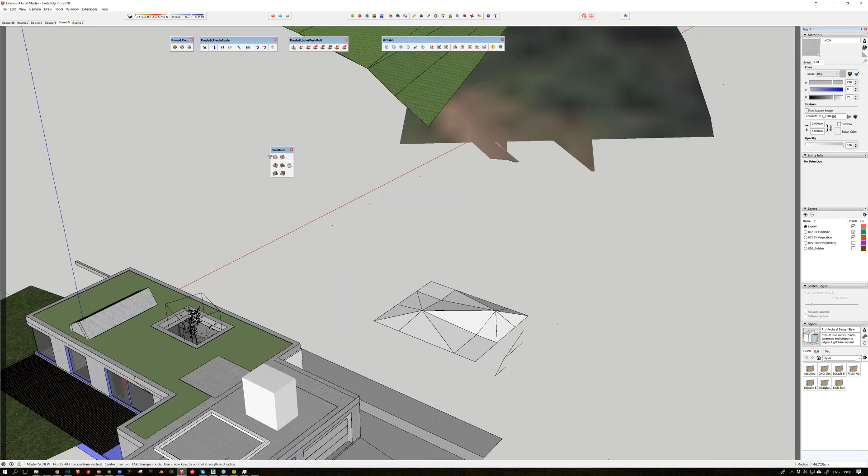This one is really cool too. It's an integrated sandbox tool where you can create terrain from level lines, or how is it called. A super useful new one is called Skatter. You know it already, and I like Skatter. It's amazing for scattering different objects, so you can do vegetation, stone, trees, whatever. Super cool.

Then there's a few cool ones by this developer. Cleanup is a necessary one. It basically cleans things up. If you import a model into SketchUp from some other 3D software, you would usually get diagonal lines you don't need, just a bunch of lines that you have to clean up. This tool lets you clean all the coplanar lines which don't define the geometry, or purge unnecessary items from the model that aren't visible but for some reason still have a definition and are still in the model even if you don't see or use them.

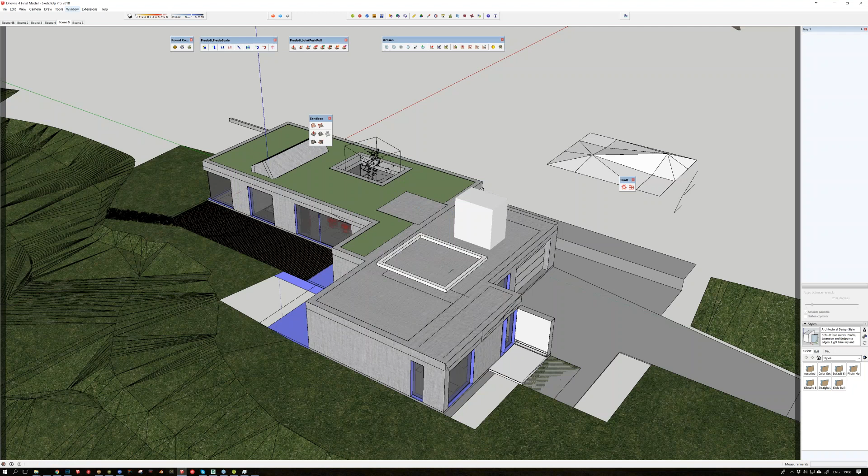Then the material tools are amazing. For example, if I want to remove this concrete material, and say this is a 10 times bigger scene and I can't see all of it but I really want to remove this concrete thing, I go to Extensions, Material Tools, Remove Specific Material. This is material 24, I click it here, and it's removed from the whole model. Great, material tools - that's one thing, and the second one is Material Replacer. Now it's gone, but for some reason it's also transparent, which I guess is the default material in this scene, but it doesn't matter.

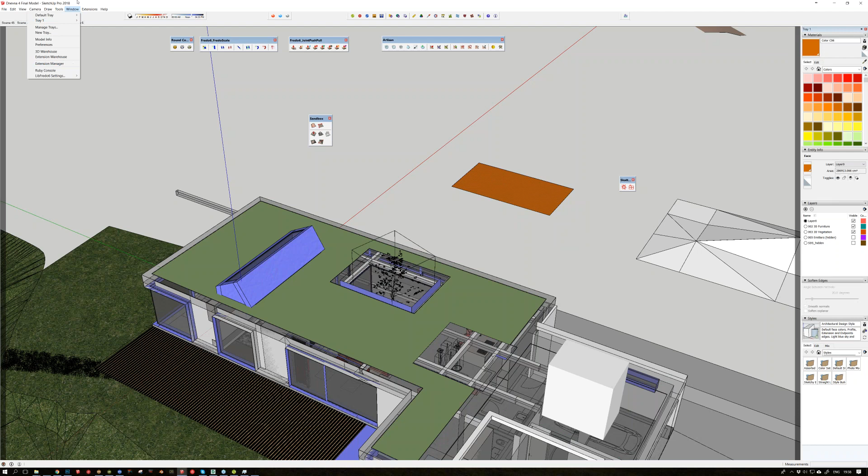The Material Replacer tool is also super neat. Basically, say this is some material and I want all of the objects with this material in the whole scene to become green all of a sudden. You just go to Window, Extensions... no, Tools, Material Replacer, and replace this one with this one, and it's replaced everywhere. This is super useful when you have huge scenes and need to change stuff.

I'll take note of these, these are pretty nice. And there's a cool one called Maxwell Render, good for rendering, that's a good one. Yeah, I heard of it. Yes, product placement.